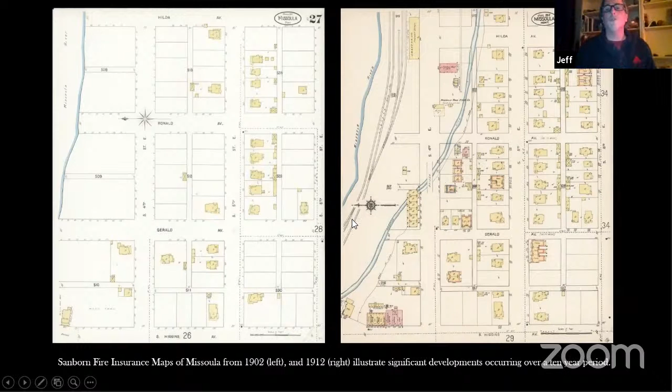following that '08 flood. So that brings us up to the point of where we're looking at these structures now, and they're interesting in how little has changed to this neighborhood since the time when these buildings were created.

And so you have, again, they're linked by materials in so much as also their bungalow kind of style, and rather pivotal for what is developing in that neighborhood around this time too, setting the tone for the kind of structures that would appear on the landscape.

But what really stood out with this investigation was the materials that were used here. In particular, it was some of the earliest use of Portland cement, quite simply put, and how it could be employed in all these different purposes—from cast materials, from concrete block, to a lot of the cast elements of the lintels, and other decorative features featured amongst the properties, these pitch-faced stone creations.

Miracle Hollow Block Company.

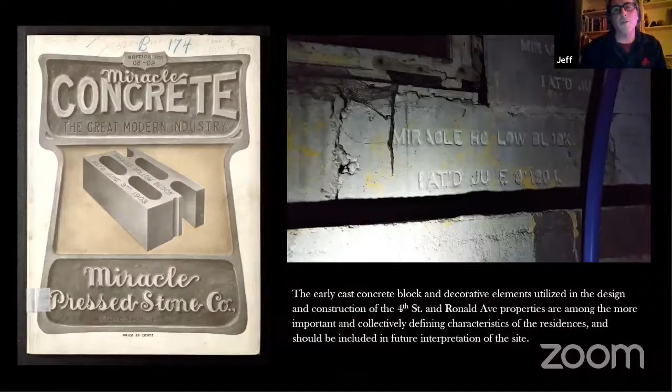They were developing patents in those first years of the 20th century when Portland cement literally exploded on the scene and had reached Missoula by way of the rail system and these new materials being developed in the Midwest. For this material to arrive, along with the trade handbooks on how to manufacture and produce it, is really quite exceptional. It was also instructing masons how to work this new material into fired brick components, so these groups of structures joined together by these distinct elements has helped pave the way into discussing what are these character-defining features and what we should be looking at in interpreting these properties.

What should we potentially be looking at for salvage, and how might the discussion go forward based on these distinguishing characteristics of these structures? So in conversation with Emmy, we developed a system for looking at these structures broken down into architectural details and contributing components like doors, windows, and hardware, and miscellaneous features, for the distinct purpose of salvage and also how we might identify some of these features going forward.

Some of the neater things I enjoyed too were the column sections meeting these knee walls, but these fantastic scupper ports that I have never seen anything like out here in the West, which allow for cleaning the porch a lot easier, sweeping and pushing water out through these kinds of ports. Little details like that became kind of the highlight of this project.

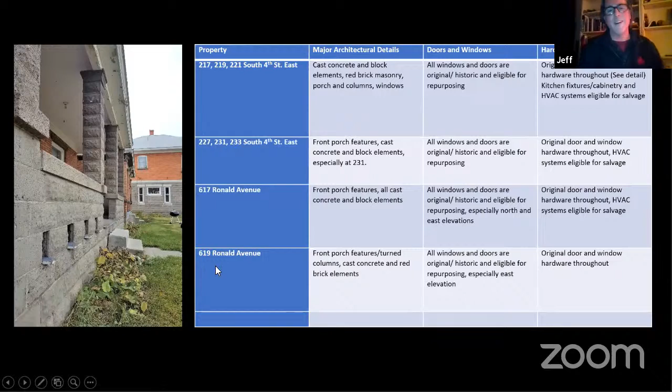So that brings us now to, once this site is re-envisioned, how will we be remembering the details of that previous age, which spans the 20th century into the 21st century? Curiously, not steps away from this grouping of structures, and here's that central structure right through the trees, is the abandoned Milwaukee rail line, now interpreted as the Native Prairie extension, which finds its remnants here and is quite adjacent to this property. This became part of a more peripheral discussion, but also how this area is being interpreted and what different interpretation strategies we might look to going forward.

That is kind of where we're at presently, looking at the stories these properties can tell, that evolution over time, and looking at those distinguishing characteristics along the line of time, looking at those points when the rail system was created post-flood, and how that really helped create these structures and the evolution of these neighborhoods in this district of Missoula.

And there's my nutshell for you, I guess, folks.

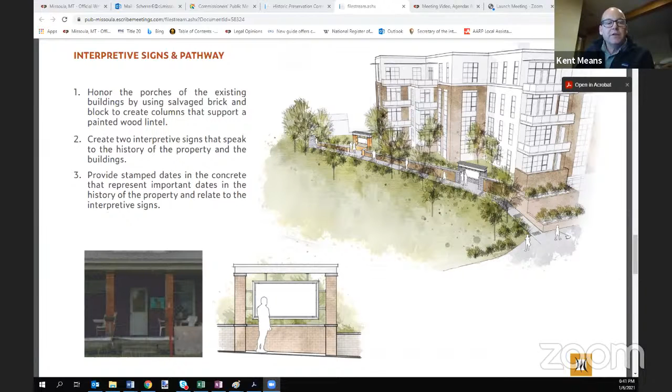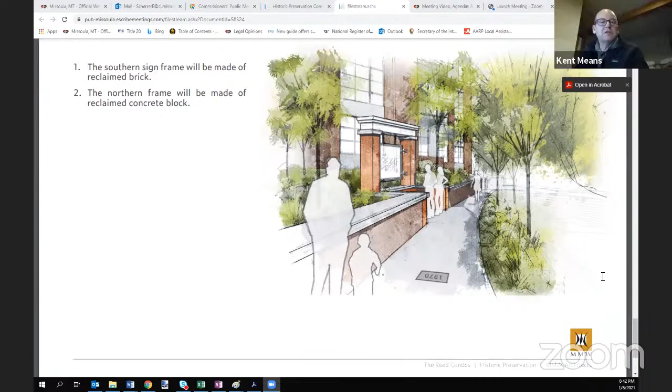Another image of that, from the top looking down, you see the stamped dates in the concrete there. And basically that was it. So thanks for bringing that up, Jen, and again apologize for the confusion.

Any other comments from the board? Yeah, Steve. I understand that this was not a HABS/HAER quality documentation project, but I would like to see us get more towards the HABS/HAER quality of documentation. But what I'd like that to go towards is making this history more accessible. And so if we can get better documentation, better visual documentation, and basically get it online, get it out to where it's accessible to people and accessible to tenants, I'd like to see some form of this be able to be a little more public, so that people know what was there and it's easier to access what was there. I think we're partway there. I'd like for us as a board, as an organization, to see what we can do about improving that, and we can use this and a few other projects as examples, I think.

Thank you, anyone else for comments? Okay, Jeff, I just want to jump in and say I really appreciate all the information you pulled together. It was pretty intriguing to look through this document and see the level of detail you were able to gather, you and MMW. So I really just want to say thank you for providing that, it's pretty cool information. Thank you, Paul, I appreciate that.

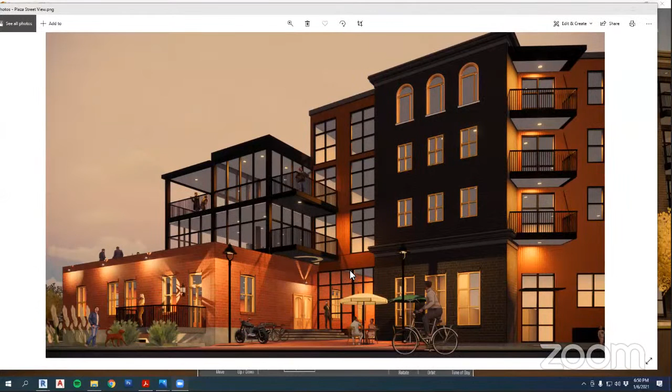Let's see, that's the one, I believe. Okay, are you seeing a screen now with the image, right? Rendering? Yes. Okay, and I think you've seen these before, right, everybody? Or maybe the new committee members haven't, but I'll just walk you through a few images first.

And I have a brief animation also, just so you get a general overall shot of this concept. So the Bissinger Warehouse is this building portion here, which is existing. Okay, let me back up.

Here it is today. It's been neglected, owned by a private owner for decades, and we're excited to bring this thing back to life and give it some integrity again. It's got a purple haze color paint on it right now. We want to take that off as carefully as we can.

What we're proposing is really virtually not changing this structure, this building. It's actually in pretty darn good original condition, not manipulated or altered, which is really exciting to me. There's been an addition over here that's not original, and we propose to take that off.

Also let me point out that up here, this is a penthouse that houses mechanics for a freight elevator that's original inside this building, and it still operates, and it's pretty cool. So we wish to preserve that, and you're going to see that in some of our renderings also. Just keep that in mind.

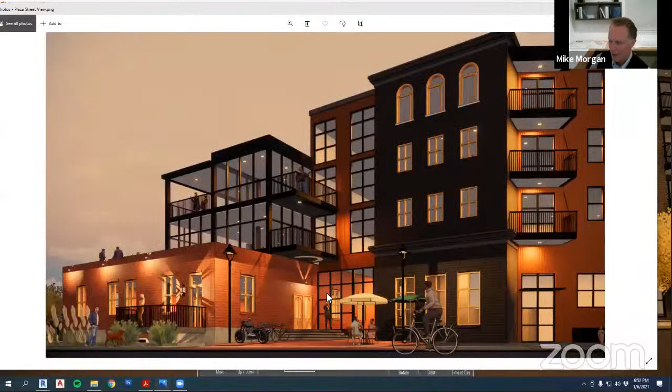And this was the result of our last meeting. I think Emmy brought that up, and I thought it was fantastic. So now that transparency and that full depth of that building can be seen, which I'm really excited about.

The rest of this project is all new, and it's all about the adaptive reuse portion of development. It's a mixture of commercial, office, manufacturing, and residential units. So now I'll just keep going, but I'm going to talk mostly about the warehouse, because that's what we're here for.

The warehouse is not reinforced, and it's very vulnerable to lateral seismic loads, and it needs help. Otherwise, it's not going to be safely protected. That concept was part of what drove this whole project too, this rooftop addition on top.

It's actually a projection of a steel moment frame that would need to go down through the warehouse next to a structural grid of timber columns and beams inside of the building that we would not remove at all. The way I see to least impact the building is to take a steel beam down next to the post, have it exposed, but all the rest of the structure remains exposed also.

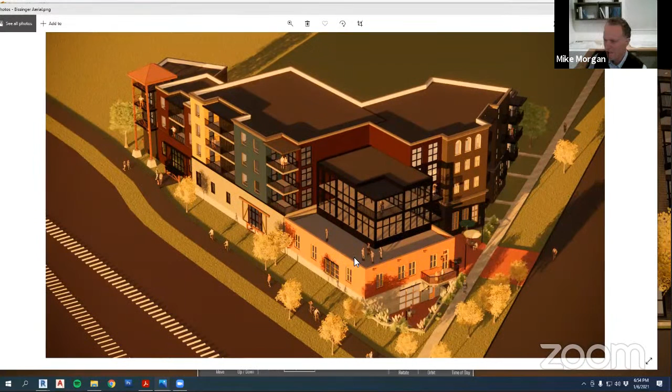This steel structure also has horizontal members that go out to the exterior to support the exterior walls, so they have some seismic help. But all that's concealed above the existing timber structure that's there now.

With a new floor system and roof system floating on top of the whole building, nothing is altered about the interior aesthetic of the building now, which is rough sawn fir decking on the ceiling and timbers. So that's what drove that.

Steve brought this up and I appreciate it. There's a story why I'm going to get into this subterranean court in front here, and there's a story of why this came about. I'm going to drag a picture over here.

In the basement is a full depth basement with about 16 by 14 inch old growth timbers inside of here. There's concrete posts that are below the timber posts on the main level. And there's rough sawn old growth fir lumber and two layers of two-inch actual rough sawn decking on top, and all that's in pristine condition.

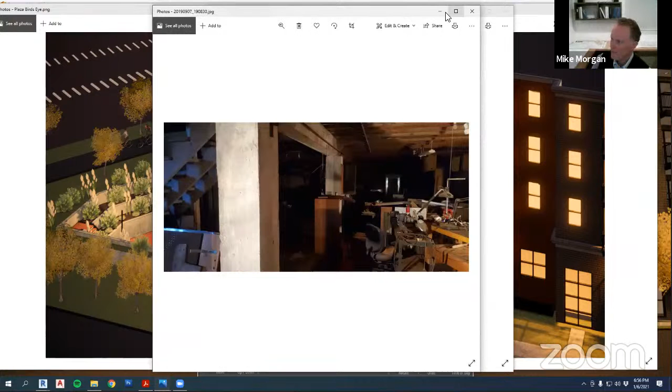The reason you can see inside of here, there's a light on inside here. Otherwise, it is very dark inside of there because there's no natural light. Here's another picture down there. This is when these pictures were taken before we purchased the building, and there was a lot of stuff down there. But this is how dark it is without light, just to give you that.

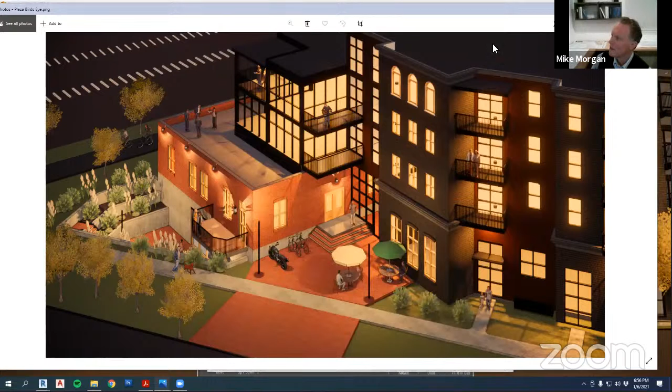Just to the right of this picture is where the exterior wall is—this concrete wall. This basement has been long forgotten because there's nothing you can do with it, since there's no way to get out of it, other than a stair right here that's not close to meeting code. It was a functional stair for storage. All this basement was used for storage since the Bissinger Warehouse closed.

And so the only way to utilize this space, which if we don't utilize it, it's going to continue to remain forgotten. And what good is that? I just don't see that as expressing the full extent of what this warehouse is. So how can we use that space and let it be something again?

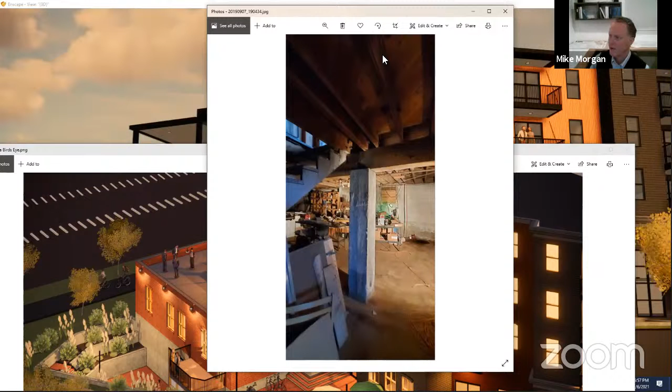Well, we can do that by opening up this end of this wall here and putting some light down there. And it also allows us to meet code to have egress so we can safely get somebody out of the basement.

The other reason why we did this is this warehouse, the brick warehouse and the block warehouse, the entire warehouse, the sewer service is still the original cesspool, which isn't functioning anymore. It's been long non-functional. It kind of works, but it needs cleaned up, and it's right here. So we need to dig this out and clean that up. Well, if we're digging it out, maybe that creates an opportunity to allow us to let this warehouse express itself, that it does have a basement, and use it. So that's really the reason.

I know it's not how it was originally presented, I understand. Does that mean it hurts its integrity or not? I guess it's a matter of interpreting what the Secretary of Interior standards say about that, but I don't think so. I think it strengthens its integrity by bringing to life the basement. Otherwise, the basement will remain what it is, forgotten and lifeless, really. All you can use it for is, I don't even know if you can use it for storage. There's no way out. That's not safe. So that's my idea for that.

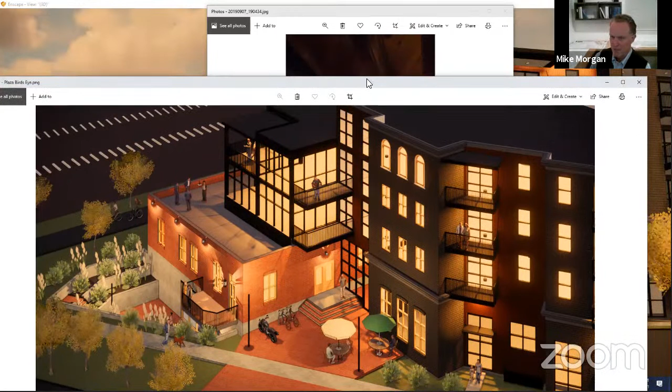So now, real quickly here, I'm just going to bring up an animation so you can get a better sense of this whole project. It just takes about 15 seconds and then it'll be done. So bear with me one second here, okay?

Let my Caleb here, who works with us, is here to help me do that because I need a little technical assistance.

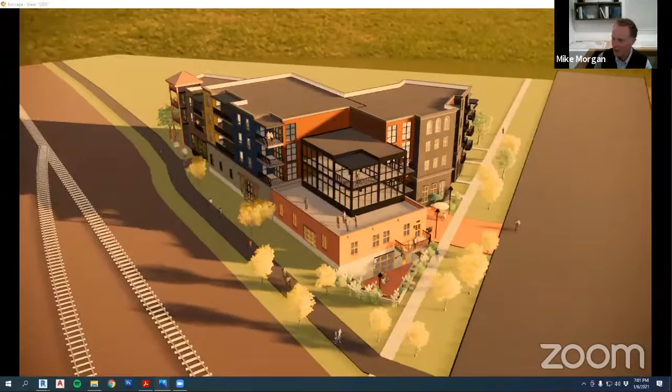Okay, so there it goes. And so we're spinning around toward now the Bitterroot Branch Trail. And we're seeing the side of the warehouse, the bottom right, brick warehouse. Behind it is a block warehouse, which is gray. And the rest of the projects are proposed, or is new development. So there you can see how that glass lets you see all the way to the back of the warehouse there.

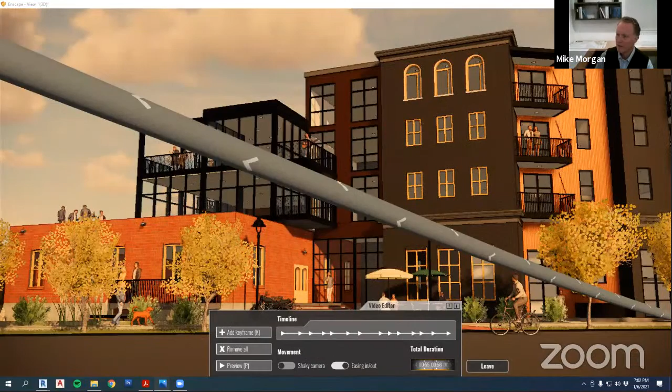Okay, so that was a quick little animation for you. And there's this view here. You can see that glass transparency lets you see the whole back of the warehouse. There's two openings, original openings that were originally exterior, that have been buried in that garage. It wouldn't be exterior with this. We're proposing a glassed-in gallery here, which would be a primary entrance, and it would have some artifacts in there and photographs of the history of the era when this was operational originally.

And we've been fortunate that Washington Corp, who has ownership in this rail link here, has artifacts, and they're happy to give us some, which would be fantastic. And they've offered to put a monument along the trail, off the side of the trail. There's originally the rail spurs still in place, and they put a monument there, and we could talk a little bit about the history of the project and that monument, which would be exciting. So I appreciate their offer there. So that's what this gallery would be for.

So that pretty well does it. I'm sure I've forgotten some things I wanted to say, but I think that covers it. This black color here is brick, but it's not the same color, trying not to match the brick. But as I read the Secretary of Interior Standards, maybe it's more appropriate that it is brick that matches that color, and that's great. I have a version of that I can show you, and some variations about this area if there's concerns. So that's about it. I'd really like to hear your input, and if we're on our way to being able to get something approved that we can move forward with after we get the area rezoned, after that I'd just like to listen.

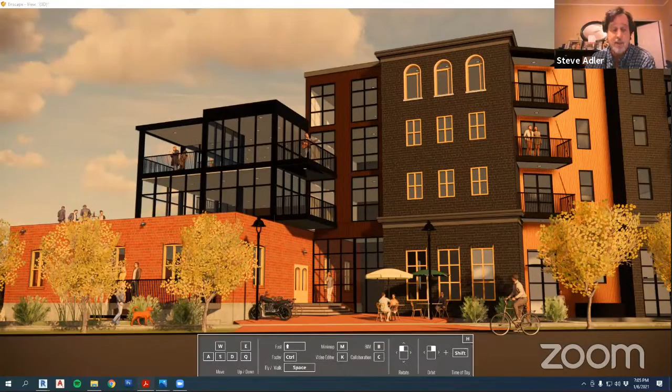Thank you. I think I mentioned to Mike previously, kind of in a typical approach, looking at the Secretary of the Interior standards and the intent of the ordinance, it's for the public welfare. I know this is not a high style building, not something that's a showpiece of its own, and I appreciate your effort, Mike, to make it as much of a showpiece as you can. I was more worried about changing the relationship of the front to the street with that sunken garden and egress patio, because it changes the whole nature of the setting and context immediately around the building. I saw that as not being in line with the Secretary of the Interior standards. So that was my main issue, that it's such a radical change in the relationship of the front, or the public side of the building, to the streetscape, that I was worried it was kind of degrading the historic presence, with so much going on around the historic, because we've already got a building climbing up over the top with the moment frame that Mike explained. So that was my observation, and it's open for interpretation and debate, for sure.

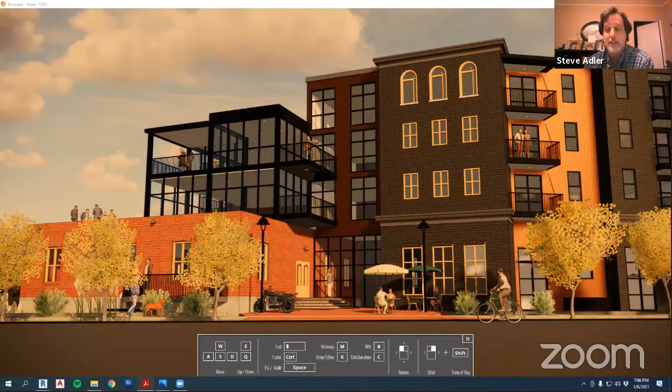I'm new here, so can you say a little bit more about the history of how it was used? I mean, it was a warehouse, but how was it used, what other uses it might have had over time, and what aspects of those are you thinking of emphasizing here?

Certainly, I can do that. Yeah, you're getting caught up. That's right, you weren't here the last time, so happy to run you through that.

Bissinger Warehouse, we don't know exactly the date it was built. I haven't been able to find the exact date. We did a pretty long narrative about the history that we submitted, and that should be in the records at the city if you want to find those. It goes into a lot of great detail that I'll forget a lot of now, but the Bissinger Warehouse was built right about the time the rail was built, and it was a fur trading company. They were an offshoot of the Alaska Fur Trading Company, an extremely successful corporation whose central office was in San Francisco, with their main processing plant in Troutdale, Oregon, just outside Portland along the Columbia River. They had several satellite locations like this one, including another in Billings that's still in place. If you look that one up, it's kind of fun, they've adaptively reused it into different retail shops. It's very similar to this one, except the brick is different, probably because the local resource in Billings had a different brick than here. Otherwise, it's the same thing.

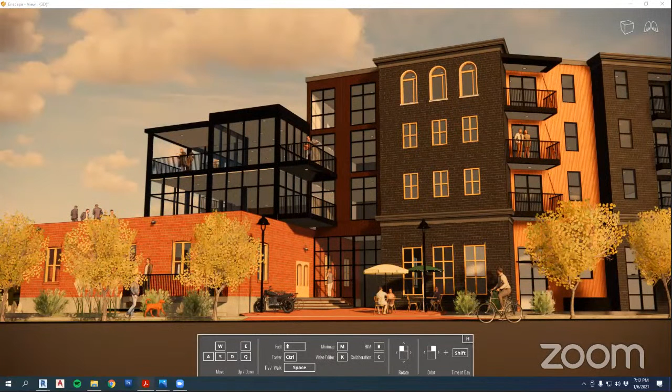Cathy: So I was looking at the black and white drawing, the plan view, and I'm looking on the Bitterroot Trail side where you have an office. I was wondering, could that incorporate a little bit of a glass wall, much like where you can see into the warehouse on the other side, to show a difference between old and new? Or maybe, I do see there's a little bit of a setback, or maybe a bit more of a setback, just to differentiate from old and new.

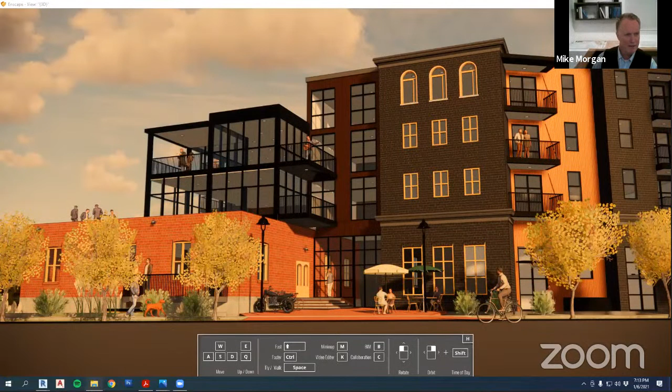Okay, let me pull up a shot and see if I can follow you here. One sec here. Where'd that go? Yeah, no, I'm gonna—you might have a glass wall there, I can't quite see for certain. Which one is it?

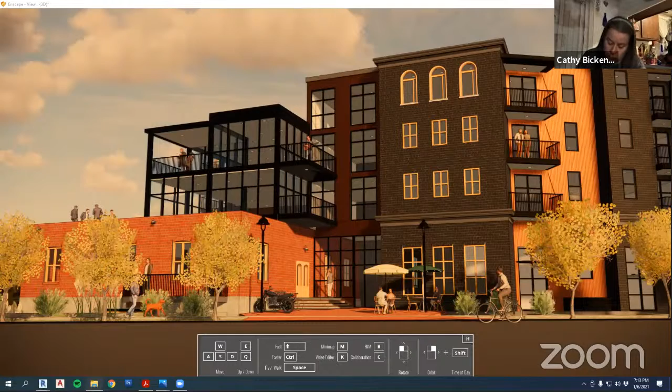Okay, do you mean like in here between this brick warehouse and block warehouse? So there's the brick warehouse and the block warehouse, and then farther back, the office. Okay, yes, I see, you're looking at that site plan, floor plan, okay. Yeah, that's a great idea. I'm going to pull up that site plan so everybody can see what you're saying. One sec here.

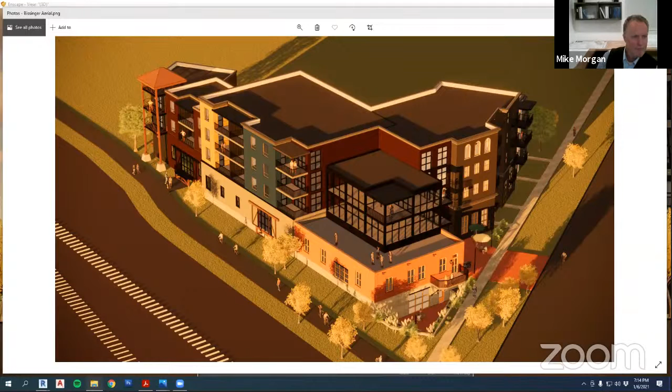I think I am anyway. Or is it faster? Jen, do you have those documents I sent you yesterday or the day before with that site plan? Are you able to pull that up by chance? Yeah, it was one of our attachments. Okay, let me see what I can do for you here.

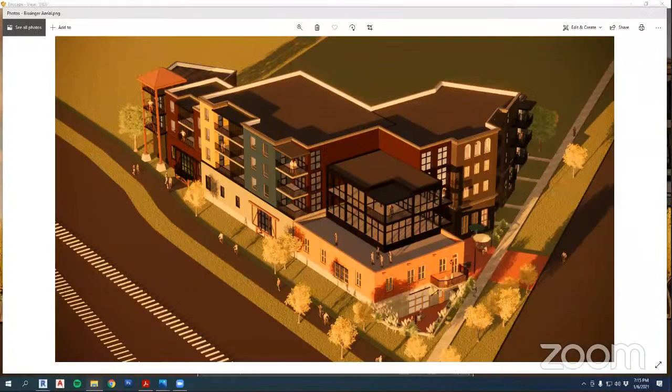Which one did you want to look at exactly? The floor plan? Yes, okay, you'll have to stop sharing. Okay, excuse me. See here, stop share, okay.

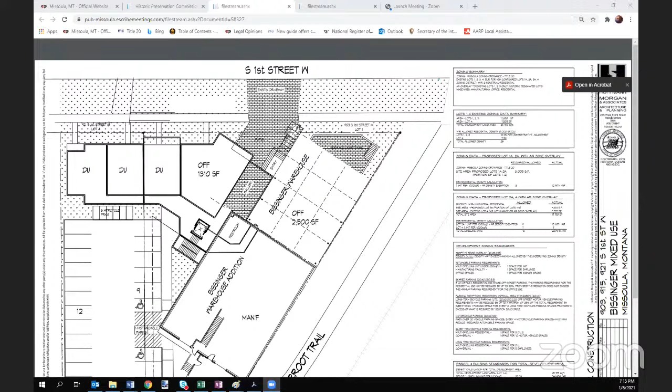How's that? Yeah, excellent, okay. And then if you scroll down? Yeah, scroll down on the drawing a little more. I will try, my PDF has not been working real well, but let's see what we can do here. There we go, yeah, there we go.

So there you go, I see what you say, Kathy, where it says office 700 square feet and manufacturing, MANF. That's the original block warehouse, or not original, it's added on later after the brick warehouse. But where we're adding on there, yeah, absolutely, we can do that. Great idea. I'll make some note on that, okay?

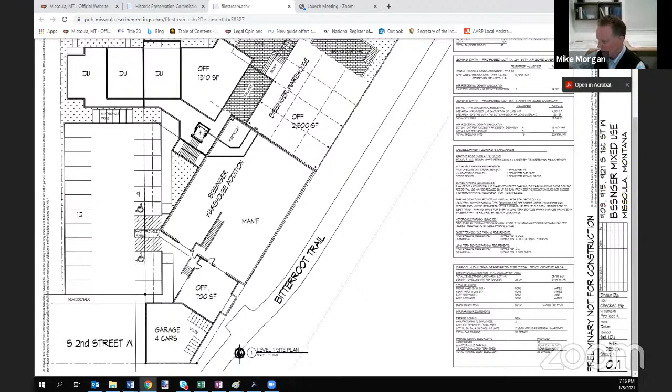Yes, Kent. I'm just curious as to about the deck, what you see as a use for that, because my first reaction is it looks so out of place, but I wonder if there's something specific you had in mind for it, because it doesn't relate well either to the plaza in front of the main entrance, or the elevation of what I'm seeing from the perspectives. It seems to be like maybe 2 or 3 feet above that elevation, but it's separate. And I'm not sure what you had in mind for the use of that deck.

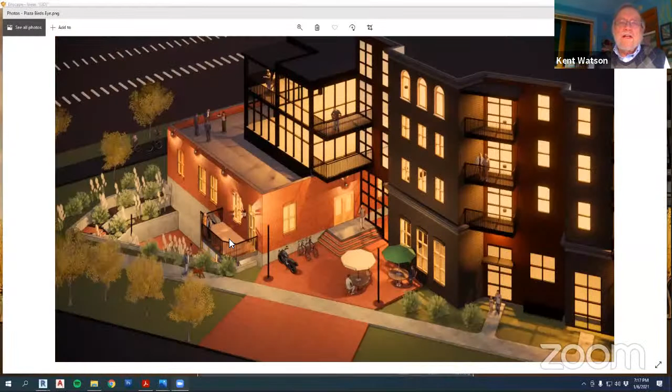It's here, you're seeing my screen again, right? No, the deck that protrudes out from the original building there. Yeah. Yes.

I've changed a little bit about that deck in this courtyard since this, and I think the only way to best describe it is to show you another rendering, and I have it ready to do that. Okay, one second, do you mind if I pull that up for you? Go ahead.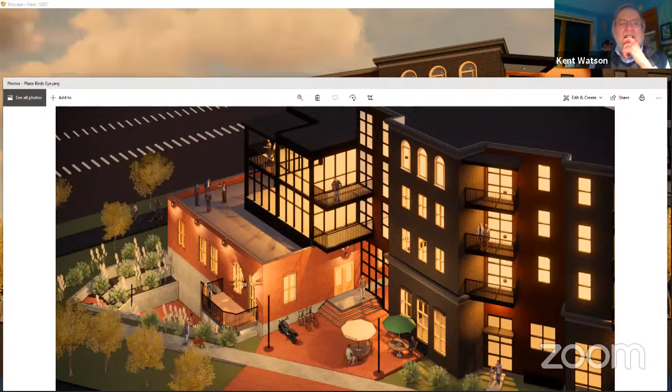So this is a little bit of difference, and not just that area. I'll just go right into the deck and the courtyard first, but there's some other stuff you've probably seen that's different. Let's see.

That's better. So this deck is squared off and not angular like the other one was, first of all, more like the building. And it has steps coming down into the plaza, more like an entry, which is what it ought to be, I believe. What do you think, Kent? Yeah, that makes a lot more sense. It really does.

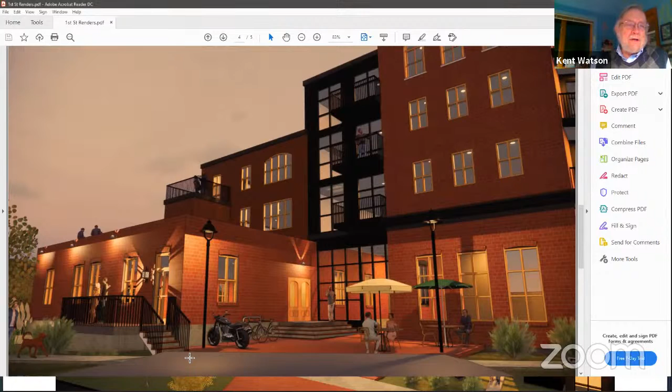Yeah, because it looked to me like it was begging to have something like that happen, so I wasn't sure which. Yeah, yeah. And the guardrail, sorry, in that square design, does that still have the sunken courtyard? I like the square design.

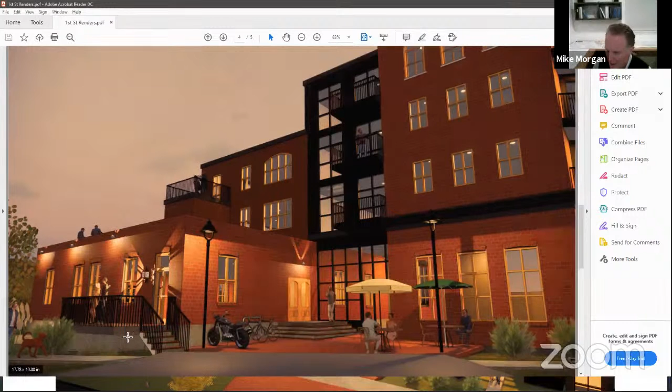I'll show you that. So under the deck is not open like it was before. It's got a, right? Yeah, let me get you a better view of that. There you go, so this looking down helps a little bit. Under this deck has got concrete to continue the same line of concrete that's there now, the concrete foundation, and it's not open below it like it was before.

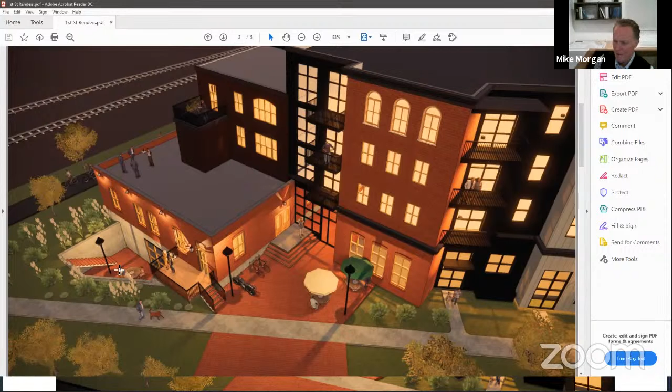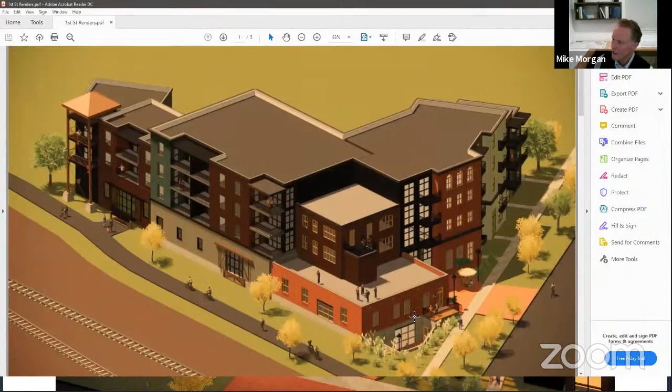This courtyard, forgive me, isn't a refined, finalized courtyard, but it's smaller. So if I, where's that other view? This one, if you, I'll try to zoom in on this a little bit more here. What happened? There we go, now how do I move?

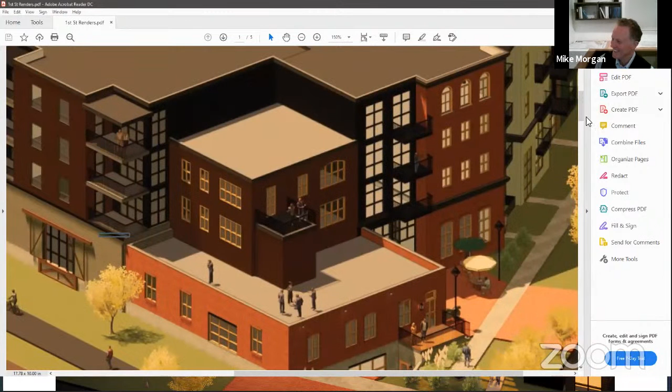Oh yeah, excuse me guys, a second. So concrete and not open below it. The courtyard is smaller, and a big reason why it's smaller is right where this wall is, where the property line is, and it hits that corner of the building right there.

And so the existing deck is projecting into the city right of way. And to do a deck there, I will have to request, which you can do, a projection permit, I think it's called, to extend out into the right of way, public property. So there's a little bit of problem solving there.

It may not allow this basement to go down like this. It's going out underneath, and then you come out like this instead of how the wall goes through now. And I don't know if everybody likes that or not. You know, all that little detail can change around, but I think the main thing is it's squared off like that building, which is probably more appropriate, and there's steps going down to be an entrance still like it originally was.

This was the front office of the warehouse originally, and that porch, whatever it was, I'm sure was the entrance to come in to do business versus the manufacturing warehouse part of the back. What do you think about all that?

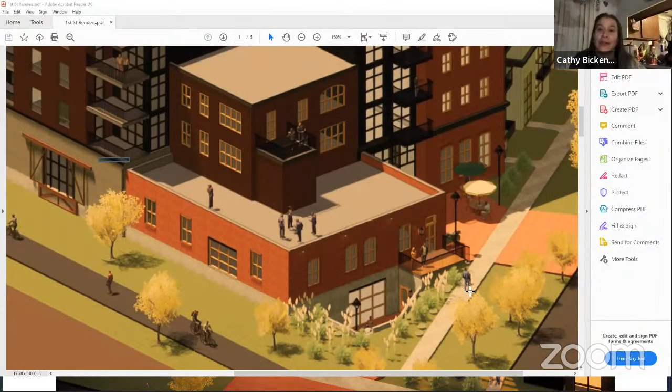I'd like the squared off design better. Okay, yeah, I agree. Oddly, I like the upper part with not as much glass as in your original one, in my opinion.

Yeah, I did that because I was expecting that might be needed. I really like the other version a lot, but you've probably seen other modern additions to old brick historical buildings, though I bet those aren't registered buildings - otherwise how could they do that? I don't think they could. I like it, but I don't think you can do both and still follow the guidelines.

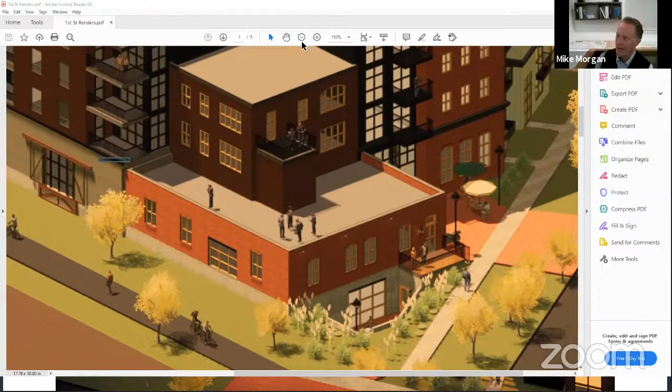This is attempting to follow the guidelines more, scale back and be more cohesive with the character of the warehouse, like what I see the guidelines saying. I think it helps it scale itself up and down with the other new development better, and it's set back more than the other version.

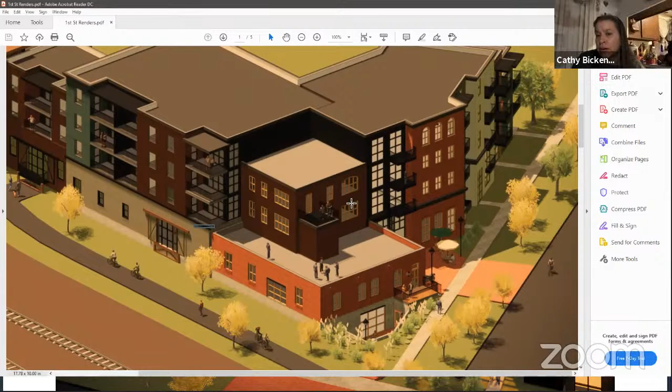This isn't brick because it physically can't be - the brick is too heavy. But it's rusted metal to have a textural color, very similar texture to it, and it also seems to highlight the elevator. That's correct, a little bit more. Very good, Cathy, thank you.

That's why I brought that picture up originally - that elevator penthouse is preserved and expressed. There it is, and we're putting a deck on top of it. So I agree, I think it's more character sensitive, I guess, right?

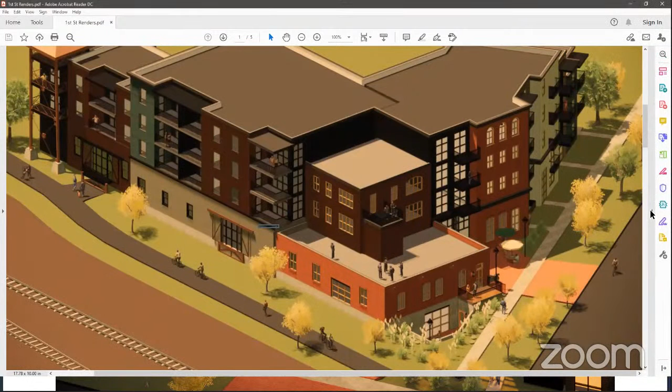Paul, could I comment? Yeah, please, Jim, go ahead. I guess I agree with Steve on that area that's done. If you could leave that up there - leave that one up. Yes, thank you.

I agree that I don't particularly like the way that's dug out there. I like the square deck. I like reusing the door and all that - that's fine, even though it wasn't original, but it works very well.

But I wonder, to bring light into the basement, if you could do something else. If you go to the track side here, you have that large area of glass right there in the middle. What if you opened up the floor more? I mean, it takes away space, I realize that, but open it up more and allow light to filter down through that into the basement without having that whole dugout area.

And I know that doesn't take care of your egress problem, but I think there are ways to find where maybe an egress could come out of it into the structure behind, or something like that within that space behind there, and not create that lower space on the street side of the project.

Yeah, I understand, and there is an opportunity to do that. Inside the warehouse, I won't bother trying to pull up pictures, but next to the freight elevator, I believe they had two freight elevators originally going, because there's a grid within the floor system that doesn't have the same decking. I can see a steel frame there where it looks the same as a freight elevator. So that could easily come out without even having to harm any of the wood that's in place, and it would let light in.

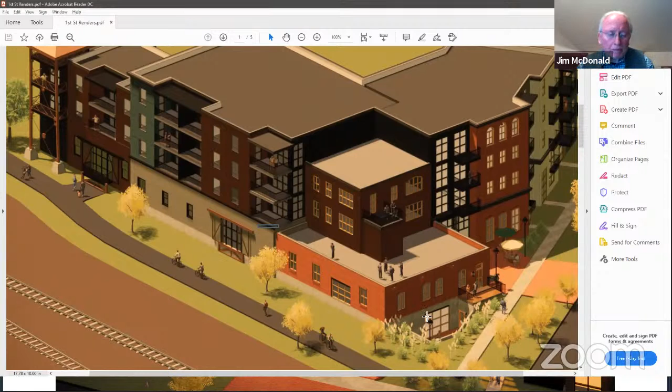Okay, is the brick matching color of this new part here? Any opinion there? Should it be matching, or should it be black or something different so it's not trying to be the same like this one was? Any thoughts there?

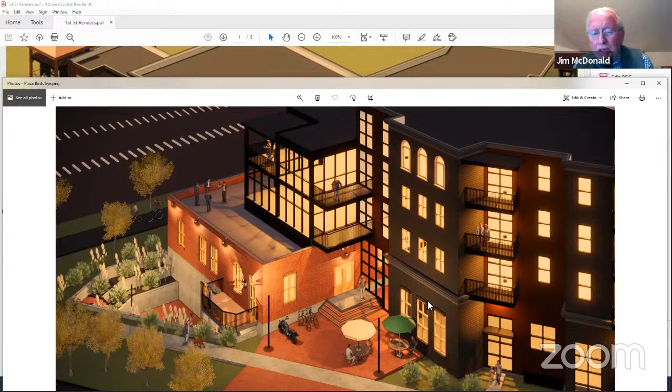Yeah, this is Jim again. I think you can have part of that because you have that separation of the glass between the bricks, and it just picks up a color that works well with the original structure. If you can get back to that color by taking all the paint off, I'm a little nervous about that, whether you're going to be able to get totally back to that color. But anyway, I don't have any problem with that because of the separation. If it was run right up to the building, then that'd be a whole different story. Okay, thank you, good, okay.

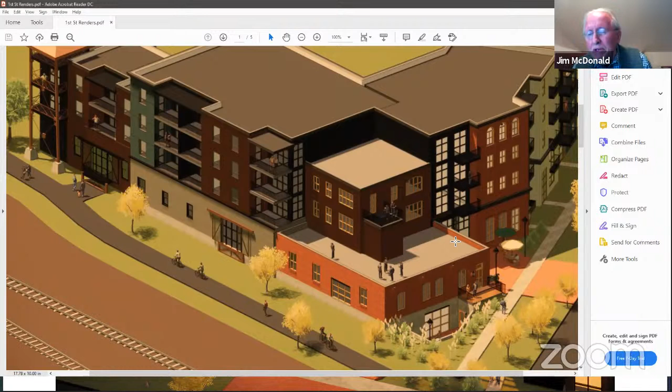Yeah, I think your brick textures are also going to show. And to add on to what Jim said, with your effort to take off the paint, it's not going to look like new brick because that's probably really soft brick. So you will have that separation of historic brick, glass, and then new brick. Great, yeah, I don't think I'm going to use Missoula brick on a new building, that stuff's not very good. Sure is pretty though.

All right, are there any other comments from committee members? Hearing none, we can wrap this up. I just want to say, Mike, thank you very much for taking the time to walk us through that and hearing our comments. So thank you very much.

Can I finish with one quick question here, just to make sure I'm on? What do you think, am I on track, or are we okay? If you don't think so, I'd sure like to hear now. But if you think we're looking pretty good with this version you see now, what do you think here? Do you think we're going to be okay with going through and moving forward when we go toward our building permit approval or application, and then HPC's review at that time? What do you all think?

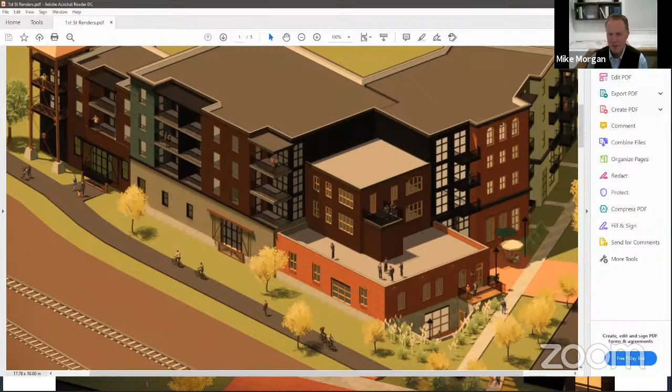Yes, exactly. And you can see where we have brick and here, we're trying to play with that same proportion of panes, but where it's new, it's different. Is that okay, everybody? You think? Okay, well, I think it sounds like we're going to be okay, we're moving along in the right direction with your input tonight. Yeah, correct? What do you think? Think so? Okay.

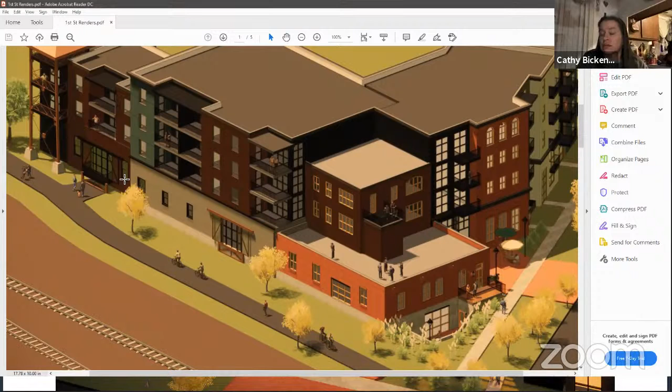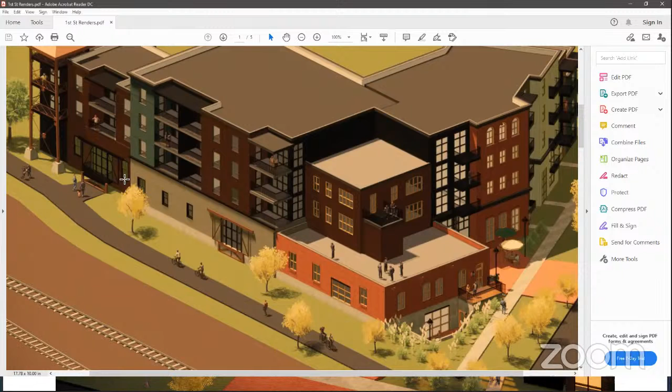Okay, alright, well thank you again Mike, very much. Thank you everybody, nice to see you all. Thank you much. Thank you Mike, take care everybody.

Okay, we'll move on. Our next item is number 6.2, Historic Covenants Subcommittee update. I will say that Jamie is the chair of this subcommittee, and without her here, I'm on that subcommittee too, and we have not done anything. So it's still sitting out there. I'll wait till Jamie comes back next month and we can get a better download of what's going on.

Lavelle, do you have anything you'd like to add there? I don't, but I think for the benefit of new commission members, maybe next meeting with Jamie present, she could talk a little bit about what the committee is. If you're patient, we'll hear from Jamie.

Okay, and then we'll move on to item 6.3, Preservation Planning Subcommittee update. There are several of us on that subcommittee. This was a subcommittee that Emmy recognized, before she left, that the Missoula Historic Preservation Plan is pretty dated and needs to be re-looked at. She was starting to organize her thoughts around developing a preservation plan for the city of Missoula, and with her leave, I'm on that committee.